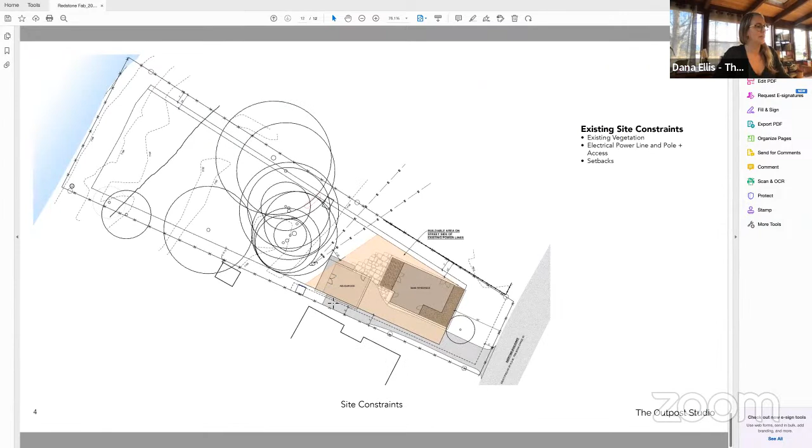I'm going to quickly jump ahead—Suzannah, we did represent this back when, I'm jumping to the end, with the flipped floor plan, but it was still in progress. We were still finalizing some things with Holy Cross Energy. We have since finalized those things.

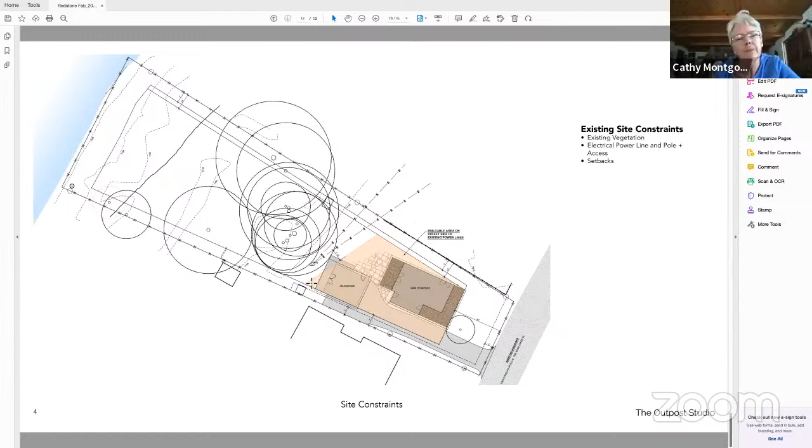This is still maintaining, but what you're going to notice is that we had to shift this little triangle of deck out of here, and it's now over here. So now I'm going to flip back. This is our updated site plan.

You can see that there's now stair access coming in a very annoying little triangle up to a reduced deck. It's less than ideal, but it keeps us outside of all of Holy Cross Energy's clearance requirements. Now, I also should say a different client, a different owner of this property, would spend the $20,000 to just relocate what is an insane location for an electrical pole.

But we're looking at a multi-generational family really trying to do this as economically as possible. That is an anomaly in Pitkin County, and we understand that.

We are making certain design decisions to keep the electrical pole because it's cost prohibitive to move it. So just to give you guys a sense of the economic scale we're working with, I have other clients for whom this would be a blink of the eye—just move the pole. We're not taking any of these decisions flippantly.

So we came up with a design that works with the clearance requirements. It's a little awkward, but it keeps all the circulation on the back face of the property, which we felt was better versus having a bigger impact to Redstone Boulevard. We're putting the anomalies or compromises as much to the rear as possible. That was intentional.

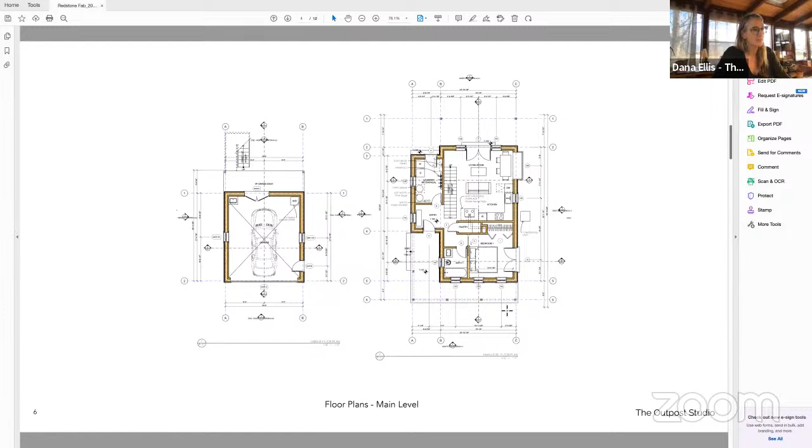The upper level, we brought the dormer to align, and I had this idea even when we were in the meeting, to align with this bathroom. So essentially the bathroom edge right here where this tub is will be within a tighter ceiling constraint. We had it originally aligned with this closet, but I think this was a reasonable and programmatically simple solution.

It does make the bed nook a little tighter, but I think that still works for this family quite well. We also reduced the covered deck back here by a few inches to tighten up those clearances for Holy Cross Energy. That was less than ideal, but it does mean our roof projection on the back decreases, so in terms of the area of roof to dormer, because of that pullback on the backyard side, we didn't achieve as much as we could have had we not done that.

In terms of percentages, the 512, we did look at the 412. At the end of the day there were a few reasons for this, but I liked the proportion we were left with between the 1012 and the 512 in this little bit. When it becomes like a sliver, there's something about it proportionally that didn't feel as good, to be honest. We wanted it to be enough of a change that you all would feel comfortable with it. Bringing it down to a 612 can happen, but this is where we landed from a few different iterations and explorations.

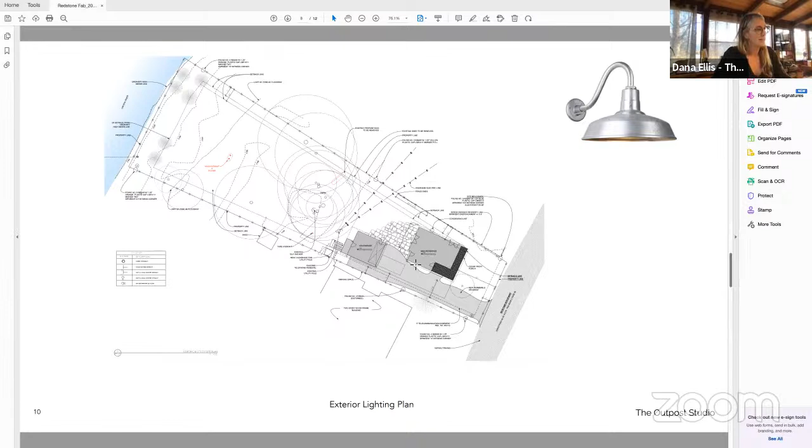And I'm trying to think if there's anything else. I think everything else you've already seen. So I'll go back to the diagram page because I feel like this gives a nice overview of what the sticking points are. And I will mute myself and turn it back to Jason.

And Jason, I have a couple other little things. Okay. The stair on the back of the garage is not in conflict with the guidelines, so that's fine.

The other thing that I recommended, this is so minor, but the flue at the ridge line should be kept as minimal as possible and not try to make it something. I thought we should suggest that having a metal flue in that location would be appropriate, as opposed to boxing it out or putting a fancy cap on it or something.

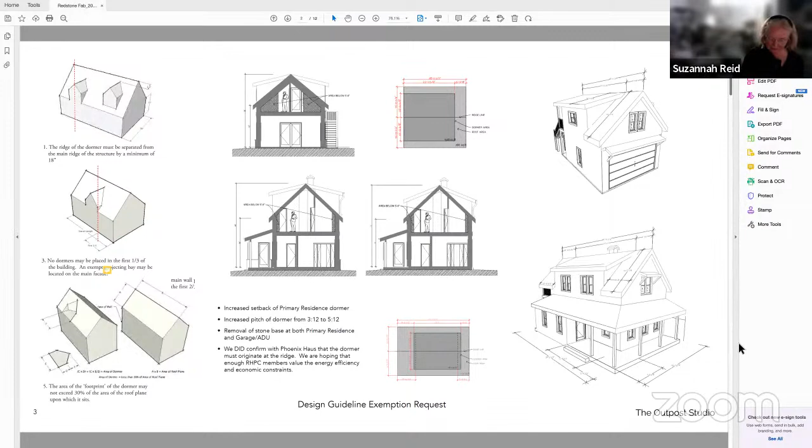Got it. Do we have any other outstanding items? The one other thing I would like is just to confirm what the roof pitches are, because the elevations have two different sets: one says 1212, one says 1012, one says 512 on the dormer, and one says 412 on the dormer on the main house. So I just want to confirm for the record which is correct.

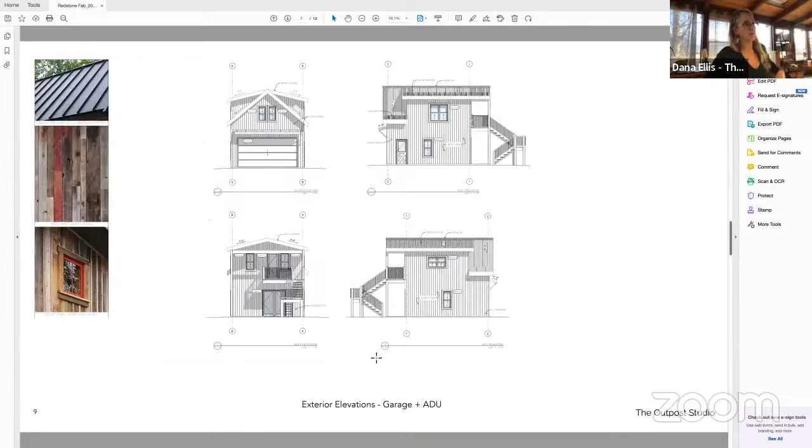Yes, so on this front elevation it's a 1012. Oh, I see that, I missed that, Suzannah. They are... I will double check actually while we're at it, I'll stop share for a quick second because I have the file open. I missed that back. I think they're 1012 and 512. That's the one I've been going off of.

That was in your head, but I just want to be sure which one it is. Yeah, the 1012 versus 1212 though, I need to double check that because as I look at that, I'm like, that might actually be 1212. Let me double check. Great, thanks. They were labeled that way in the prior application too, 10 and 12 separately. Yeah, so some of that was a holdover.

Cathy, Dorothea, any questions about the changes that you've seen?

I believe they addressed the issues we discussed last time. And the code is so specific for our needs. All the rest of it, what they could do to save money, is interesting, but really I want to focus on the fact that the modification of the Redstone Code to address those needs is what this committee has got to focus on. I appreciate the focus on the issues identified at the last meeting to meet the criteria of the Redstone Historic Preservation.

Obviously in the back of my mind is this: the historic credibility of Redstone is unique, and that's what this committee has always focused on, to make sure we maintain that integrity. I appreciate the focus that Suzannah and the board have in making sure we don't lose that intensity of protection for Redstone. It is more unique than we ever thought it was. As you look around at the construction, for example in downtown, entry to the Crystal River Valley is not quite the existence that I thought it would have at this time in history. So I appreciate that, and that is our focus.

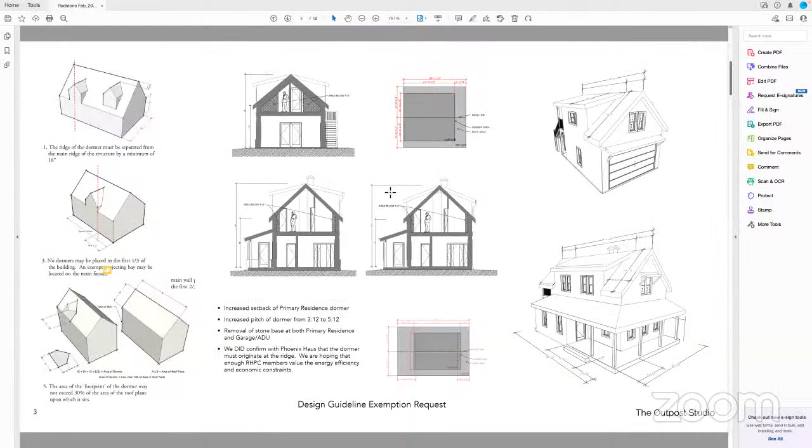Those are my questions. Unless that's prompted other questions from HPC members, I think we just need to make sure we ask for comments from members of the public if any are present. We do not have any members of the public. Thank you, Bonnie. All right, I think that moves us into HPC comments next.

Dorothea, do you have anything that you want to add from your previous comment?

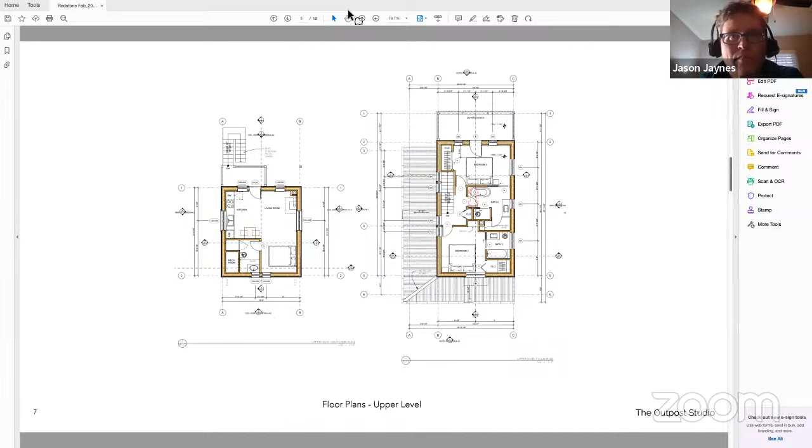Oh, if you're speaking, I'm sorry, you're muted. I thought...

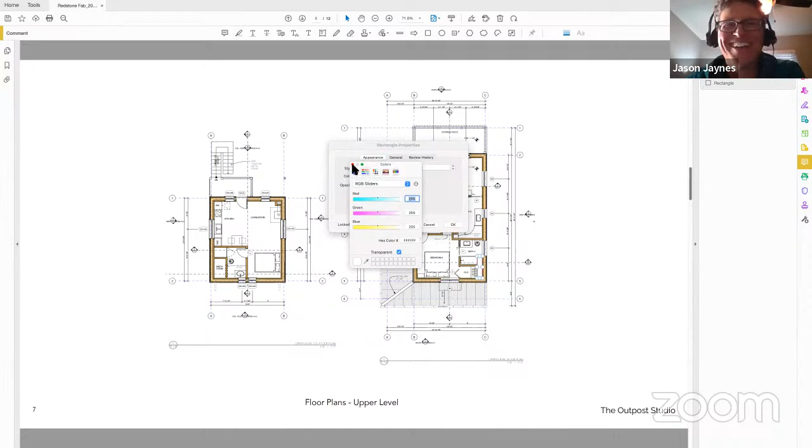I like the adjustments that have been made, and I appreciate what Rochelle and Gina are trying to do here. And I like it. Anyway, that's me.

All right, thanks Kathy. A couple of things for me. Number one, I would jump right to the flue. I completely agree with the suggestion that it be simple. I go back to my experience of when we built our house. We were concerned about the finish of the metal flue for our wood burning fireplace.

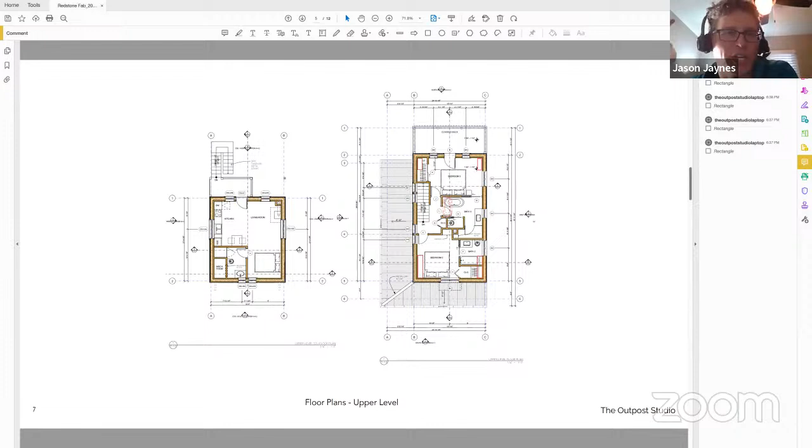We committed to putting a patina on it. We actually got an oxidizing material to put on it, and it basically ruined it. It looked terrible. So I don't know that there's a whole lot other than just trying to minimize it that we can do. And so I agree with Suzannah's suggestion or recommendation that that'd be the way to do it. You know, kind of anything else is just going to make it bigger and more visible. So I'm completely on board with that.

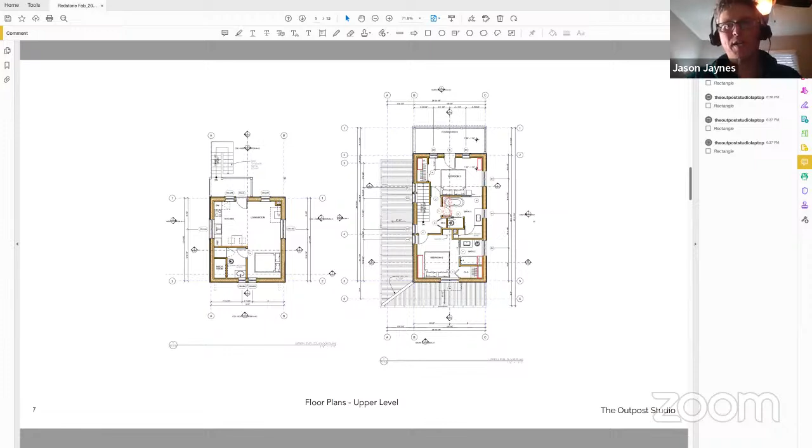And then as it relates to the other elements and items, I agree with what I think Dorothea was driving at, which is very sympathetic to the energy goals, very sympathetic to the budget constraints, which get more and more real every day, and that we have to be at a place where we feel comfortable saying we would approve this under kind of any circumstance, given the factors at play and given our review of the guidelines. And I also would echo what Dorothea said about the modifications, that it's very clear that you took them to heart. And I, for one, really appreciate seeing those changes.

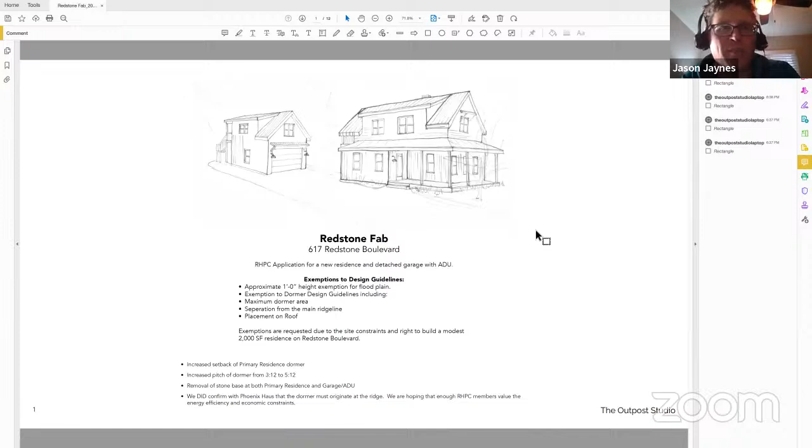I think they've made a significant difference, quite honestly, on the scale of these, what are frankly much smaller houses than you typically see out in the community. And I know that mine on the boulevard has some very similar characteristics. Reducing that plate height and reducing the scale of the second story, to me, brings these buildings kind of into proportion with themselves. Otherwise, they end up looking kind of tall and tippy and ungainly.

And so that, while the plate height requirements and the dormer requirements have very specific historic preservation kind of reasoning, I also think there's a scale of proportion kind of mass component to it, that as that plate height comes down and gets a little bit closer to being in relationship with the header of the window, quite frankly, I think the buildings feel a whole lot better, and this has made a huge difference.

And what Suzannah put in her memo that I think is really important that we talk about is, if we're moving to a place where we're going to be interested in saying, like we think we're there, or we think that we're close and we'd like to move forward, to not, even though an individual application doesn't set a precedent, but to not just completely open the door to having two-story buildings on any future application and having to defend the integrity of the guidelines.

I was looking very closely at things like the lot constraints, and initially I wasn't so sure that the lot constraints were a huge factor, because there are other quite small lots, in quite narrow lots on the boulevard. But when you take some simple measurements, the overhead lines in the back are significantly more constraining than in most cases. And it largely has to do with the rake of that kind of second line that runs across to the neighboring cabin. And that pulls in 15 or 20 feet of usable lot space.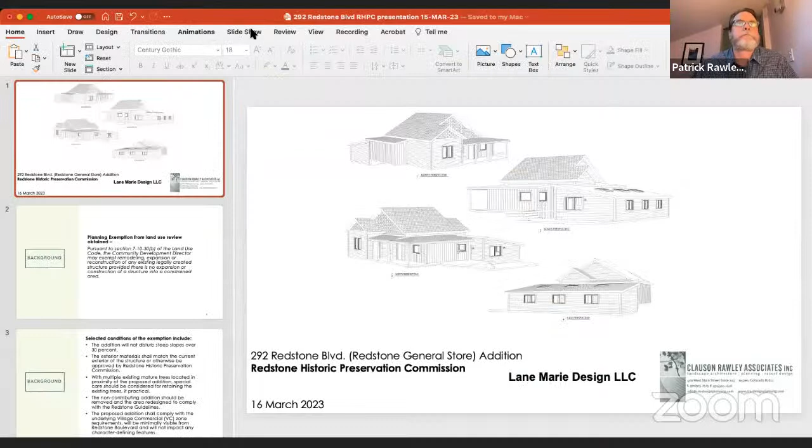And we'll go through this presentation and try to make it as painless as possible. So again, this is 292 Redstone Boulevard. I love the Boulevard—I think of the Boulevard of Fame when I start thinking about it. But this is the general store. As Suzannah has pointed out, this is a rather utilitarian addition to the rear of the historic resource for expansion of the kitchen facilities and some other back of house additions that will support the commercial use of the general store.

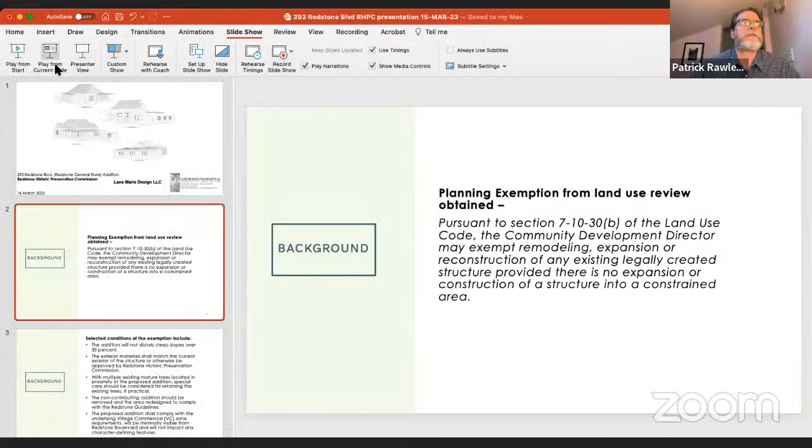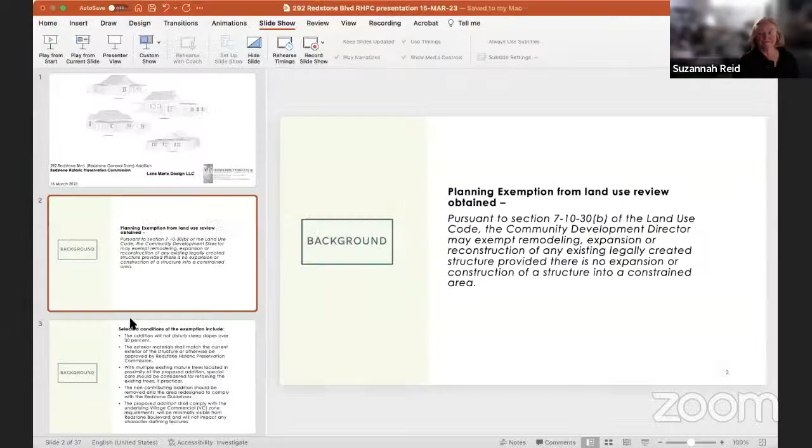Pardon the interruption, but it's flashing in and out, and I'm getting a lot of black screen on my end. I don't know if that's just for me or everyone. Oh, I'm so sorry, let's see. Let me try to get out. It's giving me a weird presentation view that wasn't happening before. Is that a little bit better? No? Doing it. You can just— Is that a little bit better? Yes, that's better. That's staying.

Good. So a bit of background on this—I'm sorry, now I need to try to change my view. So a bit of background on this: this matter was actually exempted from land use review by the Community Development Department. Exemptions are utilized by ComDev to allow greater time for more detailed or more involved land use applications. Generally it's small additions like we are proposing here, additions and activities that don't impinge upon geologic hazards or require additional studies. So we were given an exemption from the land use review process.

Now I can't forward—there we go. Now we have a number of exemption conditions that have dictated how we have approached this project. Of course we can't disturb slopes greater than 30%, which we aren't—we're on a generally flat town site lot, as everyone is familiar with. The exterior materials—staff told us to match the current materials, or whatever recommendation you provide to us. We look forward to discussing those materials and responding to your suggestions.

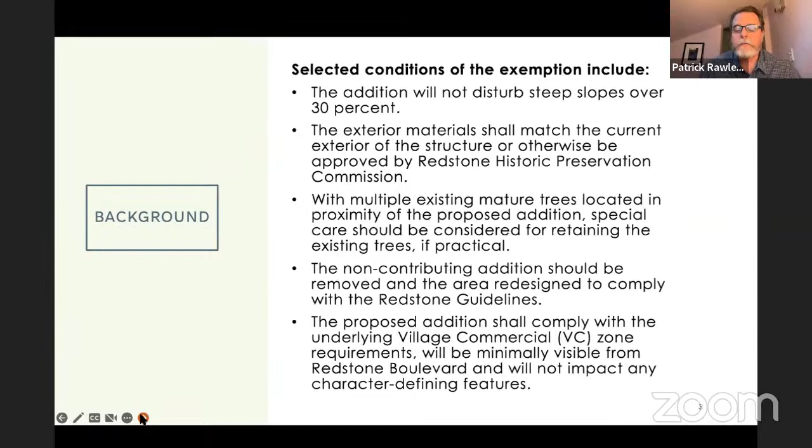A condition of approval is that we need to comply with the underlying VC zone district requirements, and—very importantly here, I want to stress this—be minimally visible from Redstone Boulevard and not impact any character defining features. So that has dictated how we have approached this addition, to provide a very low slung, quiet addition to the rear of the property that doesn't take away from the historic character and integrity of the resource.

Continuing on, the staff has required—that's why we're here tonight—we need a resolution from you indicating that the building plans have been reviewed and that we comply with the relevant guidelines. We need to provide a detailed revegetation landscape plan, which would be mitigation for the one spruce tree we propose removing. If the configuration of the addition is modified, or the separation changes, that will impact the second spruce tree, which is fairly large and would have a greater impact if lost. We also need to provide representations that the colors are indigenous, earth tone materials and colors. We'll discuss that in depth, but that's generally the overall exemption we received from community development.

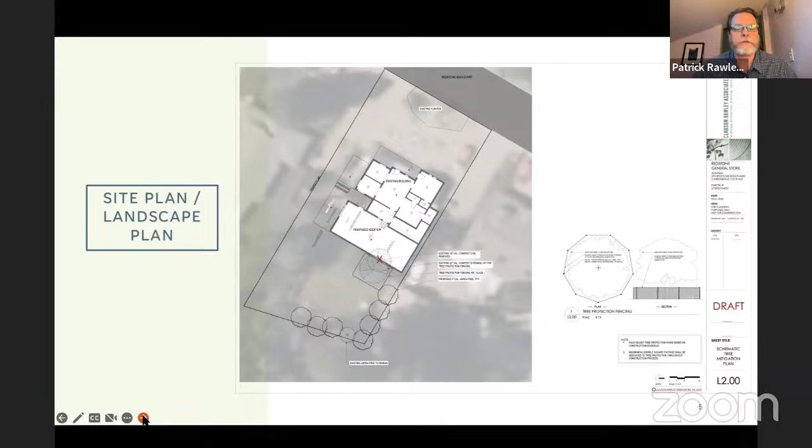So with that, I will turn it over to Lane to discuss the architecturals. Lane, just give me a nod or an indication that you want me to advance the slide. You're muted.

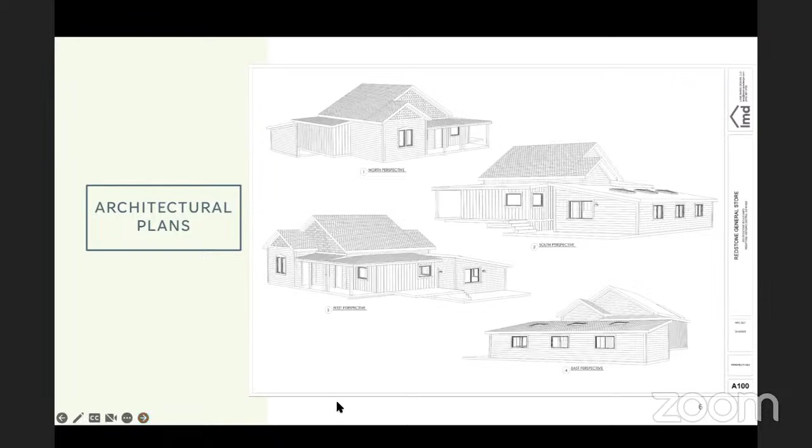That might help. So these are just the perspective views—Suzannah, I saw in your feedback that you wanted to see a little more detail added. So I did some additional work on the model, adding hatches just to more realistically represent the trim conditions and siding conditions of what we're proposing as well as what is existing there.

You can go ahead, Patrick. I guess I would like to point out too, this is the north perspective, but it's really kind of the western facade. This is the front of the general store as we appreciate it, with some non-historic additions, and then the addition we're considering tonight here in the back.

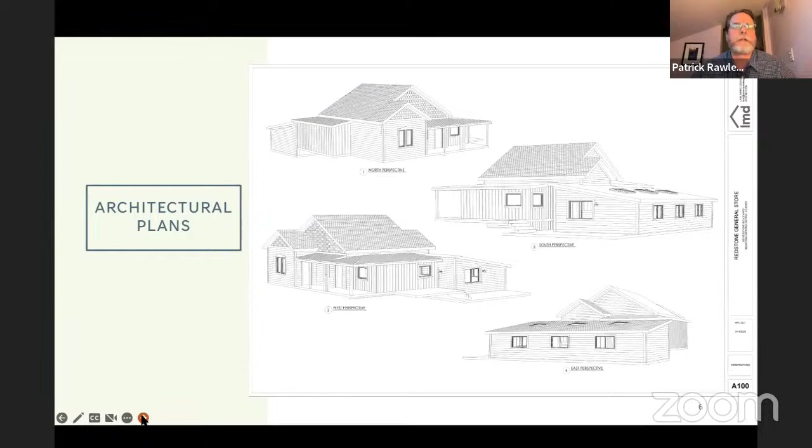This view is south, looking really kind of quartering the parking lot. Here is the wraparound deck on the store, and here's the addition. You can see this wraparound deck again, what we appreciate as the general store, and then what the view in the rear yard would look like. Just wanted to help orient at that. Sorry. Thank you. No, thank you.

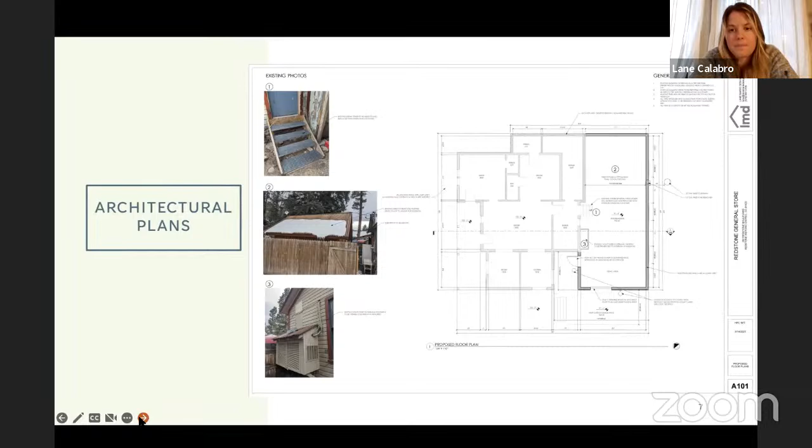This is just demonstrating the roof plan a little more clearly with added materials as you requested, Susanna. I kept the shed roof the same pitch as the other shed roofs already attached to this building. Again, like Patrick was saying, it was really important for us that this would kind of just go away and you could focus on the main store, which is still the first thing you see as you're driving by.

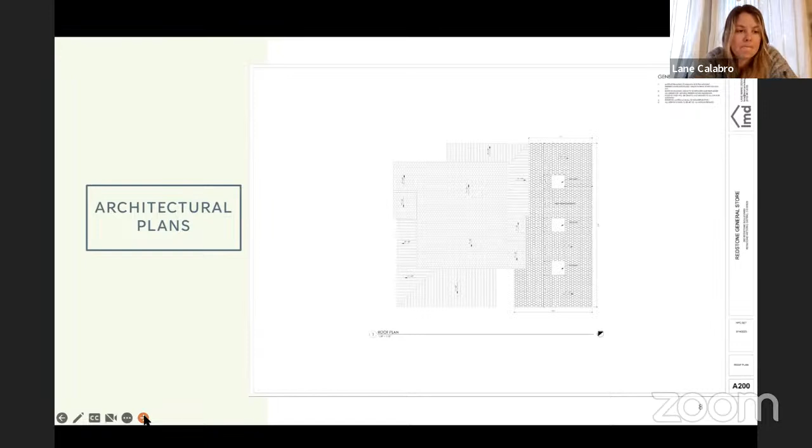We've got some elevations here. So the existing has been grayed out, whereas our addition is a little bit darker.

One thing that came up that Patrick and I were discussing is we could reside that shed that has the pallets in front of it, because it doesn't look that great right now. So we could do something that would tie in more seamlessly with our addition, making it look like one mass, all intentionally constructed together, rather than the piecemeal situation it is now.

And then along the back, most of that is already covered by a fence. There's a little shed roof—you can see it's there in blue. It's open on the side. We'll demo that, clean it all up, and enclose this area.

I wanted to address the windows too. I really went with the horizontal oriented windows because that is what's existing on the ice cream shop area.

You can see one of those windows behind that pink little trailer there. That was really driven by the plate height on that lower edge of the roof, which isn't very high. So we wanted as much natural light as possible to come into the new addition, and also to have operable windows. They're just horizontal sliders, but we'd do a wood sash window to match what's existing, and also include the 1x4 trim painted red, as you see on the historic building.

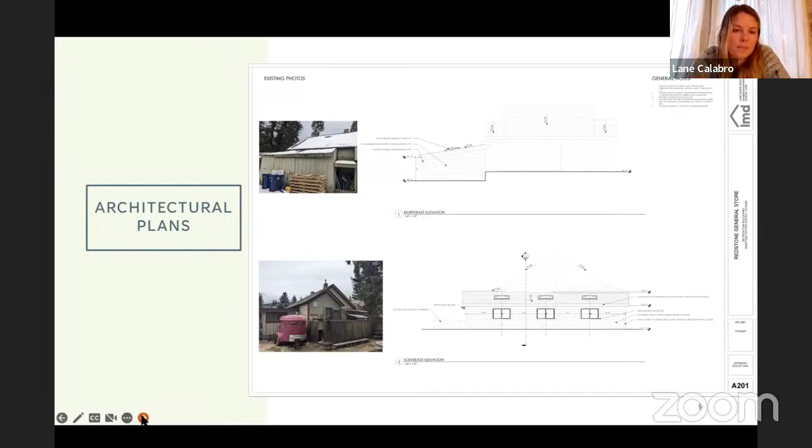You can see the windows here as well, same proportions as that ice cream shop, as shown in the photo and elevation. There's even another one on the lower, southeast elevation facing the street. So we're playing off that, really expanding the customer-facing area, having a window you can pass through, like another kitchen, so there's another spot where people can line up and get their food, or whatever that turns out to be.

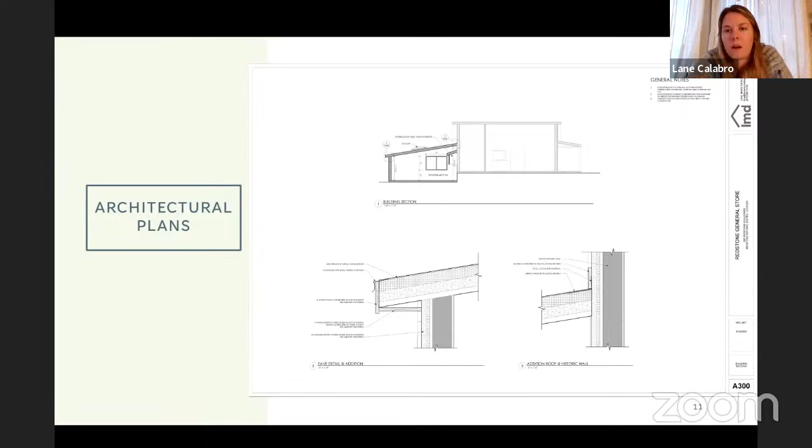These are a couple more details that were requested by Susanna. I did a basic eave detail showing we're going to do a wood fascia to match what's existing, just a very simple trim drip line. We're not going to do a big gutter, just a little drip edge there. The section detail to the lower right shows where we're tying into the historic building, where there will be some flashing to make it watertight. Then, as is done on the front of the building already, we're adding another piece of 1x trim and painting it red, matching the condition of the shed roof that covers the patio on the front.

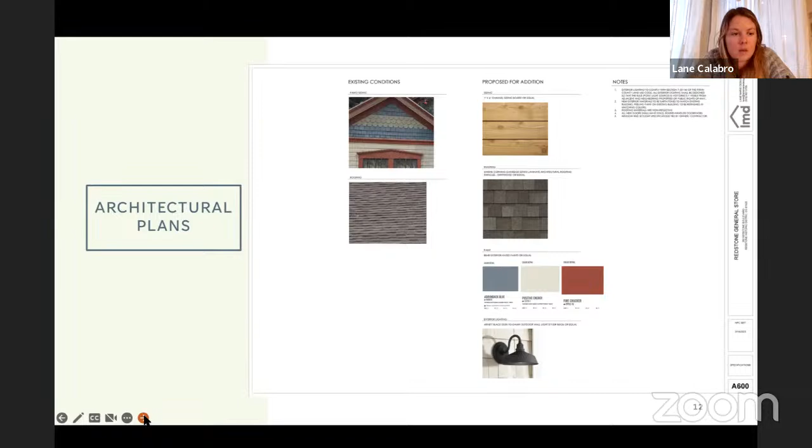Thanks, Lane. So I wanted to go through some of the standards for approval that Susanna has provided. It needs to be compatible with the general design, massing, volume, and scale of the historic structure. Susanna has responded that it's a one-story addition to the rear, as it is.

But the application doesn't specify if the addition is attached to the historic sections of the building or to later additions. So we'll clarify that — as Lane has already noted, the addition will generally be attached to non-historic walls, with only one area of connection to historic walls. That's indicated, I believe correctly, Lane — yes — in this small section right in the middle of the building at the rear, where we'd be attaching to historic features.

As Lane already pointed out, this hatching on this wall is a non-historic addition, while the historic elements of the structure are shown in that lighter gray.

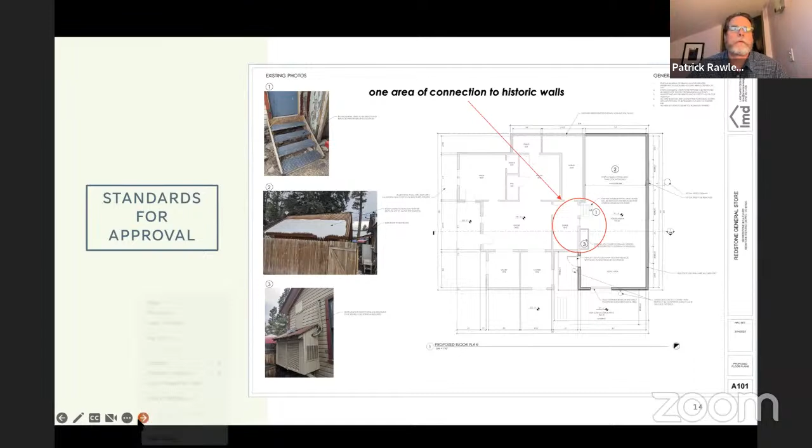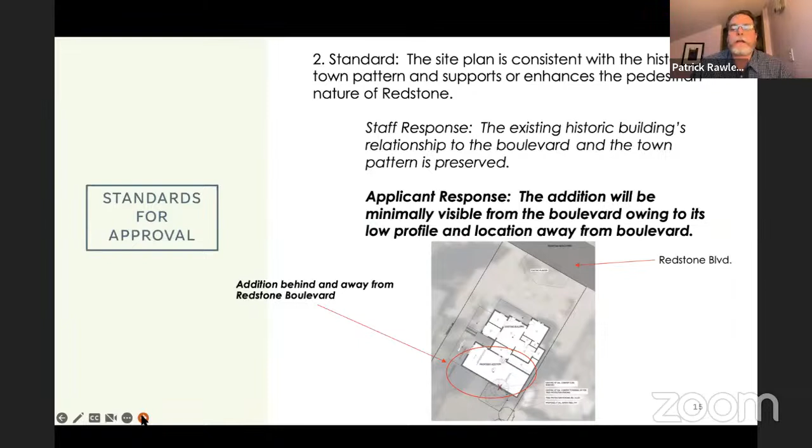Sorry, having a little sensitivity with my mouse. The next standard is to be consistent with the town pattern and enhance the pedestrian nature of Redstone. Susanna has responded that the existing relationship to the boulevard is preserved. What was driving our approach was that the addition will be minimally visible from the boulevard, maintaining the pedestrian environment we all know and love. The low profile nature of the addition will emphasize the importance of the historic resource rather than drawing attention to the addition in back — a very utilitarian, back-of-house type feature we're trying to create.

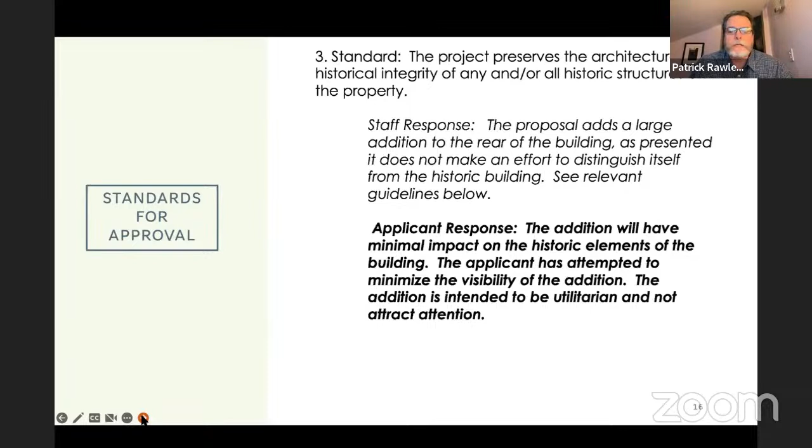Standard number 3 is the project should preserve the architectural and historical integrity of any and all historic structures on the property. Susanna has noted that the proposal adds a large addition to the rear of the building and doesn't make an effort to distinguish itself from the historic building. What we've tried to do is minimize the impact on the historic resource and its elements as possible, so we wanted to minimize that visibility. As I've said, it's utilitarian and not meant to attract attention.

So again, looking at this, what we all appreciate is that the general store should be the focus of the structure and of the property, and that the addition in the back just slowly fades away, so people won't fully appreciate that it's actually there. In fact, we're cleaning up a lot of messiness that is behind there, unifying the construction as it sits today.

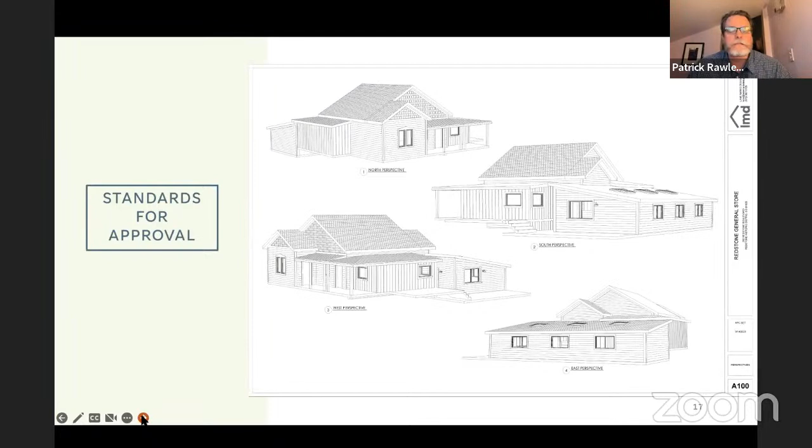Now, the question of parking has arisen, and this was not something we addressed with the exemption letter, and frankly we weren't really anticipating this being a question. I understand the front yard is a bit unique, but I think that reflects the previous use as a gas station. The parking demand is not anticipated to increase with this addition. Again, this addition supports the existing and ongoing commercial activities. The VC zoning requirements require 2 spaces for commercial activity, and frankly, because of the nature of the general store and how it serves the community, that probably would be detrimental to the commercial use.

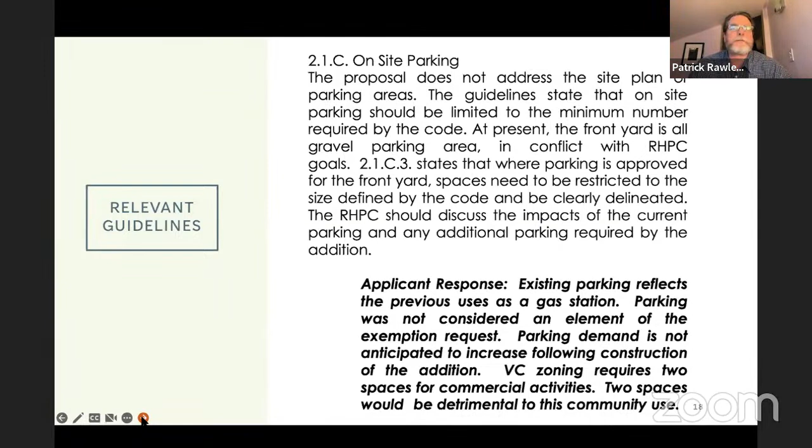Concerning the topic of the dumpster, I fully understand there's an interest by the RHPC to limit the visual impacts of dumpsters from the boulevard. We really hadn't addressed that, but we'd be happy to. Lane and I have come up with a couple of options. Mine is probably the more easy, low-hanging fruit: provide a trash enclosure to obscure the dumpster, which could be done generally where the dumpster is located today. We haven't studied it closely, but that may have some issues with setbacks. Still, the trash enclosure could be useful in breaking up that northern facade to meet the relevant guideline of a 30-foot wall length that you have instituted.

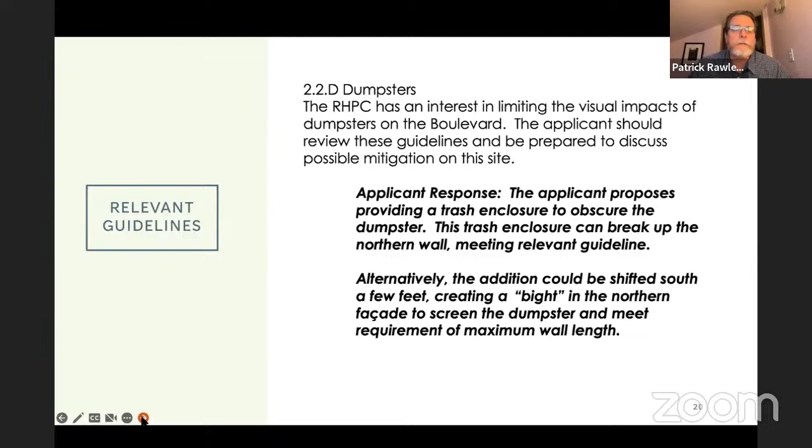Another option Lane has come up with is that this addition could be shifted to the south, which would create what I've called the bight - a little area where the dumpster could be tucked in, screening it without requiring an additional trash enclosure structure. It would also serve to break up the facade wall on the north side to meet that 30-foot requirement. Here's a very rough sketch of what it could be. The possible dumpster enclosure would be located here, in kind of a common drive between 292 and I believe 306, the property next door to the north. Or here's an indication of how the addition could be moved to create this notch or bight where the dumpster could be located.

Lane, do you have any comments on that? I hope I represented that accurately. Yeah, that was exactly what I was thinking - to kind of kill two birds with one stone, having a more dedicated place for the dumpsters, especially since we're fairly close to that lot line on that side, and also breaking up that 30-foot run, as you said. Right, and there's actually some utility there - this is a driveway, so it could be an issue, but that's certainly something we'd be happy to study. I think it's a bit outside the topic of the addition right now, but we could certainly look at that.

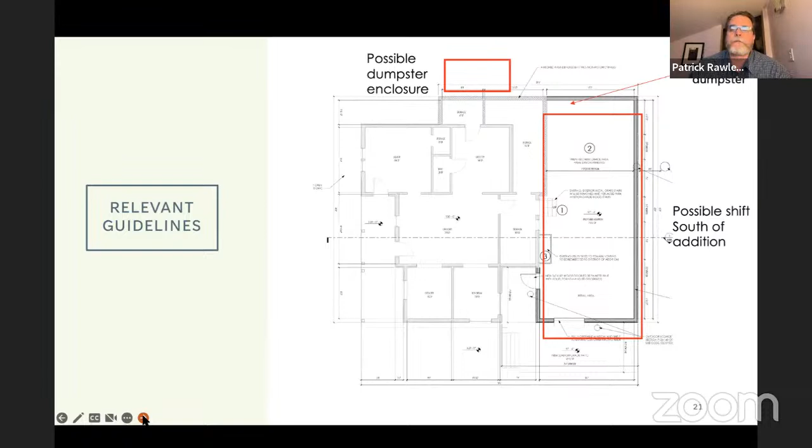Concerning signage, we have no additional signage being proposed as part of this. Again, this is an addition to the ongoing commercial activities, so no new uses would be instituted that would require any additional signage. I think everything is adequately signed, so nothing is changing in that regard.

Concerning the landscaping, we are removing that one conifer, and if this addition were to change, we would likely lose a second, larger tree in the back. And that, as I've stated several times, was one of the reasons for the restrained approach to the nature of the addition.

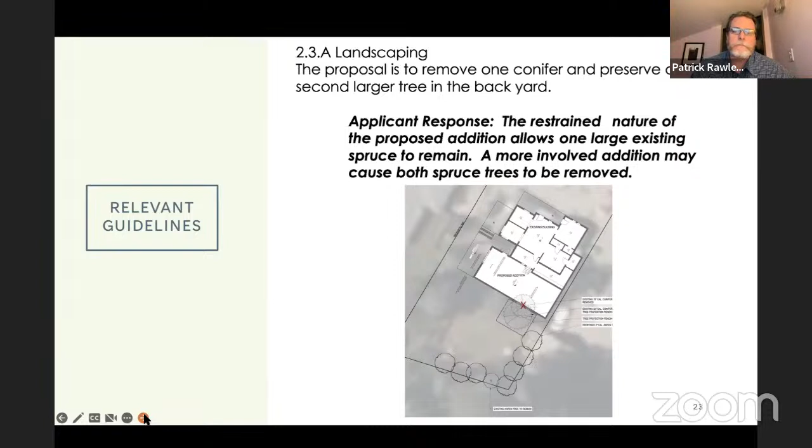Some of the guideline continues. It's unclear if the addition is attached to the historic resource. We have talked about this - we're only attaching the addition to a relatively small area of the historic resource on the rear, trying to use as much of the non-historic resources to attach the addition.

Now, concerning whether or not creating a clear distinction of this addition, making it something different that would stand out - Susanna has indicated possibly the use of an asymmetrical gabled roof, similar to what is existing but also distinguishing this addition. She's also discussed the desire for additional separation between the non-historic addition and the historic resource. We have about 7 feet where the guidelines specify 10.

And then we go back to that topic of the 30-foot long wall length that is being shown. We've attempted to address that with what we were talking about with the dumpster, or possibly shifting the addition south to attain the 30-foot threshold. The addition is trying not to draw attention to itself. Utilizing an asymmetrical gable, I think, would increase the visibility of the addition and also the impacts.

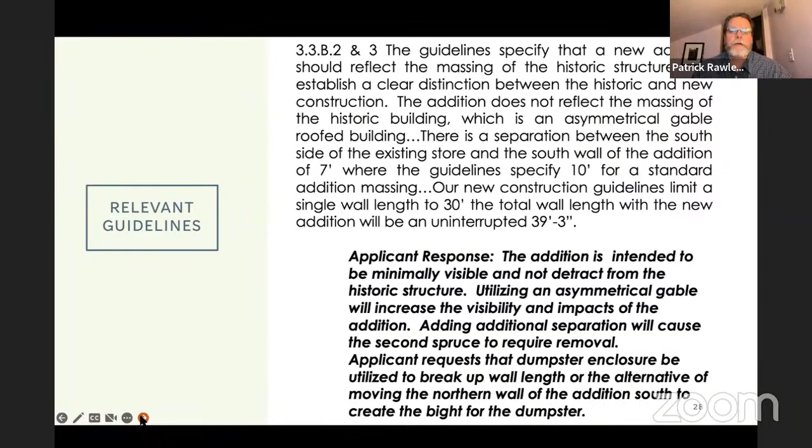That's actually kind of what we were just talking about - the asymmetrical layout, trying to use as simple an approach as possible, and also the fact that there are existing shed roofs, that additions have been made to this resource, and that was done in a shed form. So continuing that precedent is keeping with the shed roof form.

The design of the proposed roof does not complement the historic form. The roof pitch and the skylights are located in the rear two-thirds of the building. As I just said, the shed nature is intended to mimic previous non-historic additions, thereby differentiating the additions from the historic resource - not trying to mimic what was historically done, but maintaining something of its own time and reflecting the nature of the use.

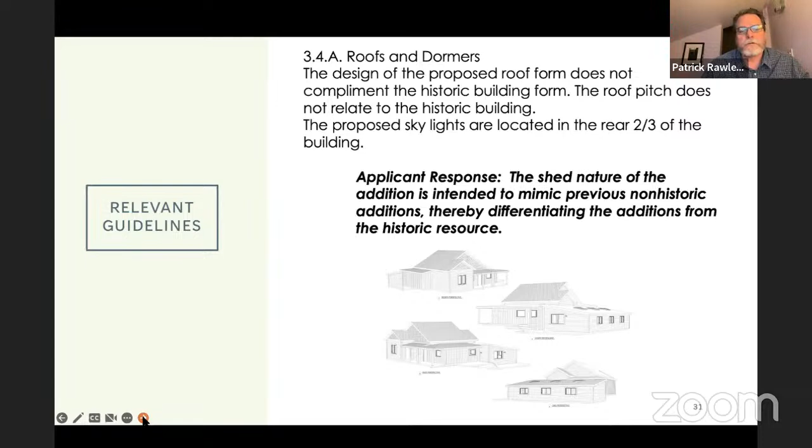Concerning the windows and doors, maybe Lane, you'd like to speak to this at greater length, since it involves the architectural design. I touched on it a little when we were looking at the elevations, but essentially I chose the horizontal proportion because there are existing windows proportioned that way, and because of that low eave, it makes more sense to have a horizontally proportioned window. However, we will tie into the existing look of the historic windows by having the wood sash, including that 1x4 trim, painted that red color to match what's existing. So it ties in quite seamlessly.

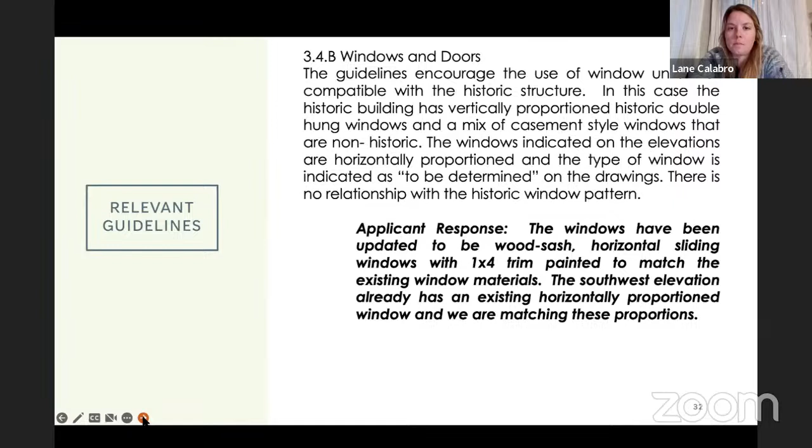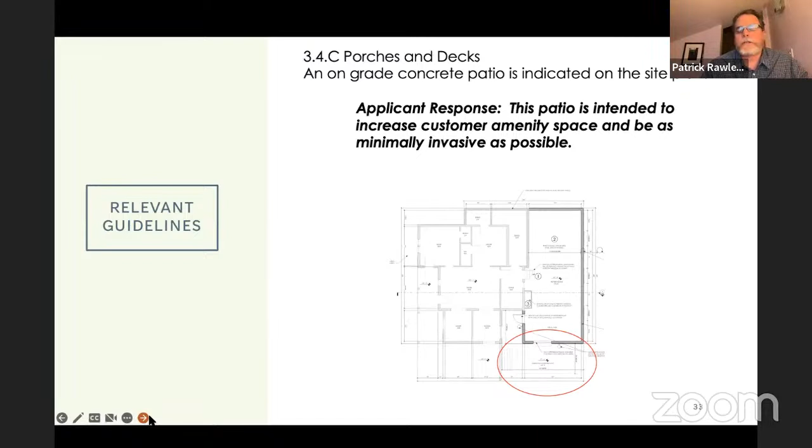There was a question about the on-grade concrete patio - this is a patio to the south of the addition. It's intended to increase customer amenity space, with that window, the walk-up window, and also to be as minimally invasive as possible. So it's just creating a bit of support to the commercial activity that's ongoing.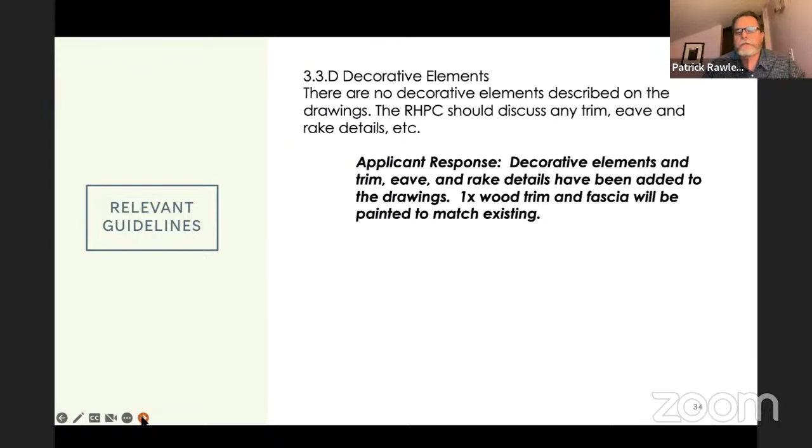I believe this is a similar discussion for you, Lane. Yeah, we talked about this a little bit in those section details that I added into the drawing set - we'll be adding 1x trim fascia, trim out the corners as well, and paint it that red color to match the existing. And I think that's a similar comment to the decorative elements you discussed before. Mm-hmm. Right.

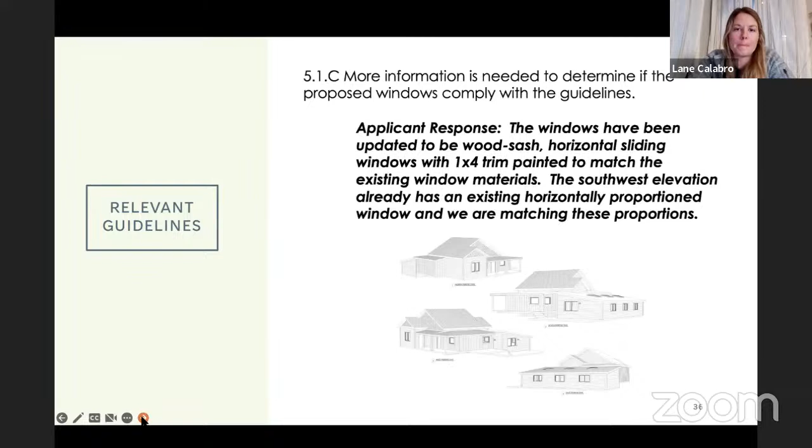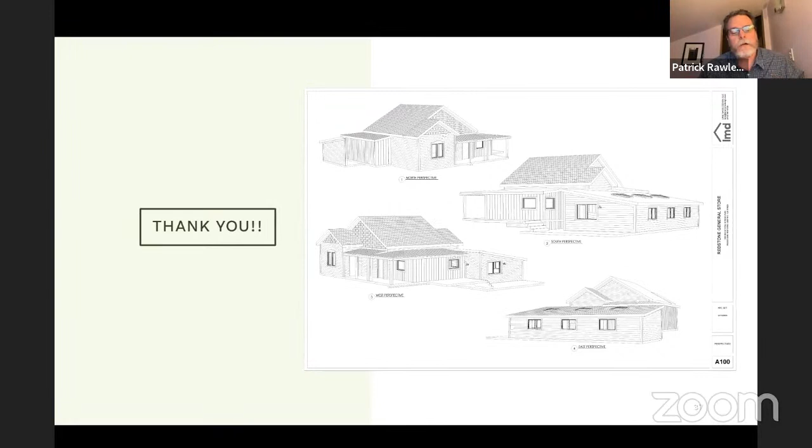Yeah, this is essentially repeating the same about the windows, wood sash, wood trim, painted to match. And so with that, that is the completion of our overview.

I hope that gave everybody an idea of really what we're proposing, and hopefully responded to some of the questions that Susanna had, giving us a greater opportunity to discuss this proposed addition. So Patrick, Lane, thank you very much. I'll keep the presentation in the background. I also have Lane's drawings available if we want to refer back, Susanna.

I just wasn't sure if you were back or not. Go ahead, okay. I am back, and I know it's time for questions from RHPC board members to staff and or to the applicant.

I do sort of wonder, because of the nature of having updated material and some updated information here this evening, if we should start with a question to you, Susanna, about whether any of the clarifications or adjustments that have been made would change the staff memo response, or if that's going to take some time to process after we talk about it today.

I guess my feeling overall is that while I appreciate that it's a low slung addition to the back, I kind of have the feeling that this whole design is being informed by other not quite appropriate additions to the building. And while I can't boil it down to a specific guideline, I think some restudy to take it to the next level would end up with a better overall project in the long run.

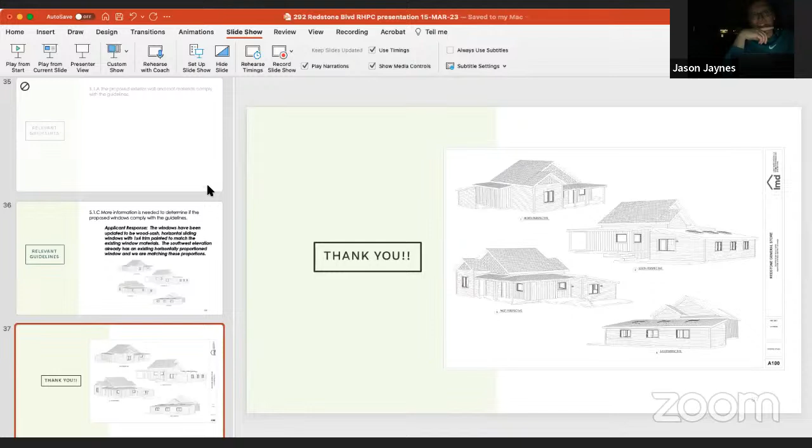I'd be happy to comment on that. I agree with everything Patrick said about this being low profile. Doing a whole design overhaul with something that would mimic that offset gable, I think could be a little more obtrusive.

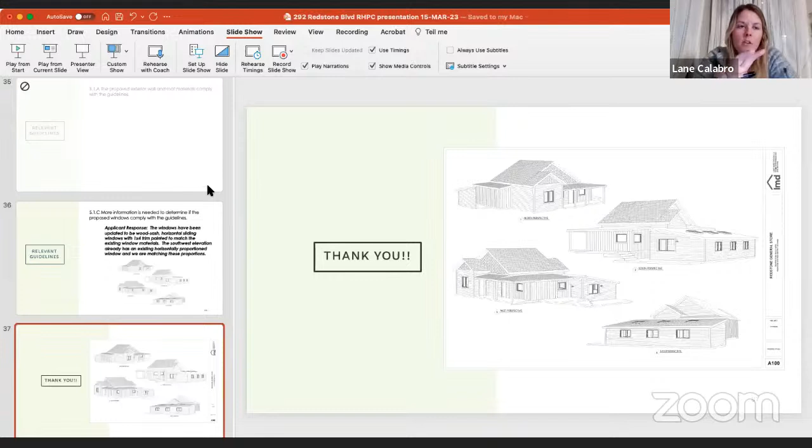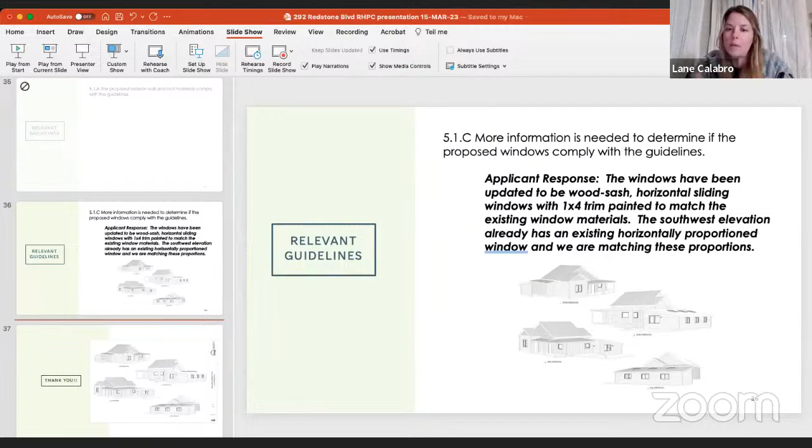But I do think, kind of the slide that Patrick was on where we talked about moving the addition slightly to the south, so it's set back - so we break up that one long wall, and maybe we jog out the addition somewhere else so it's not just a box. Maybe it becomes more of an L shape or something like that, so we could kind of tweak the form of this.

So it doesn't just look like this big chunk on the back, and it can potentially go away a little bit more and lean into that goal we have, that it's really just a utilitarian structure meant to clean up that back area and make it somewhere people would like to come have an ice cream and hang out. Right now it's a mess back there. It looks horrible, like old stuff piled back there. So I think it would definitely benefit from cleaning it up, and I think we can make some tweaks that would really make it complement the existing building.

And to add on to that, depending on the feelings and positions of the board, we're more than happy to accept some conditions of approval for a restudy and working with Susanna to verify some things, but keeping the overall approach. But maybe if we can deal with some of the smaller things, Jason, that you pointed out, through a condition of approval, I think that could be useful.

Cathy, Dorothea, do you have specific questions? I'd have a couple more after this, but I want to open that up to you.

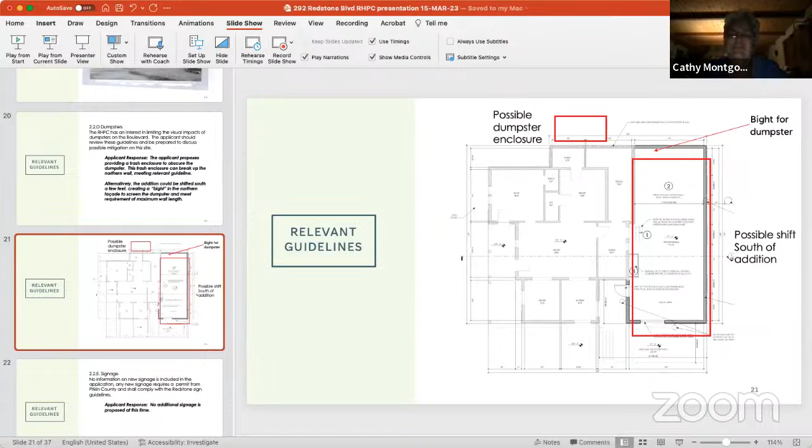Thank you, Lane. Cathy, do you have questions for Susanna or for Patrick or Lane? I kind of like the offset where you tuck the dumpster in that little section on the side there. I think that's better than a big enclosure, personally speaking. Just a comment.

Thank you, Cathy. I'm sorry, I'm just looking at my notes here. Oh, one question I have, because it does seem like a lot of the driver around achieving the necessary square footage is the second spruce tree. If that spruce tree weren't there, how would you have approached the addition design differently?

Rather than having it the whole width of the existing building, we probably would have made it more narrow and going back further into the lot, so it would be even less visible from the main street. But it's just so nice to have those old trees, and it creates such a good feeling when you're back there to have trees and for things not to be clear cut. We really wanted to preserve it, and yes, we wanted to maximize the square footage we're getting here. So we compromised by removing that one tree and adding the others.

Patrick, do you have anything to add to that? No, only that, just as Lane mentioned, trying to keep as many trees as you possibly can. They are beautiful spruce trees, they provide so much amenity to the back. It's hard to kind of look around them. When you come to a site and try to do an addition, you look at all the things working with you and against you, and it's really important to try to keep as many of those trees. So I think we didn't even consider doing otherwise. It's integral to the site to keep as many of those big trees as we possibly can. And as you saw, staff in our exemption echoed that - try to keep as many trees as you can, and mitigate if you can't. So I don't think we really considered anything other than working around as best we can.

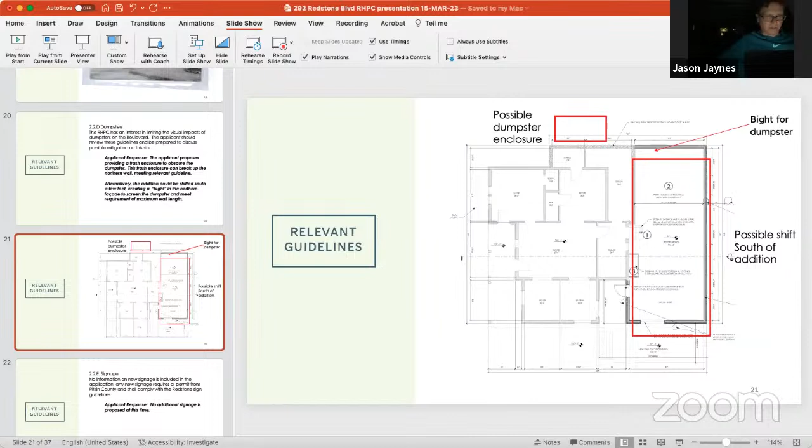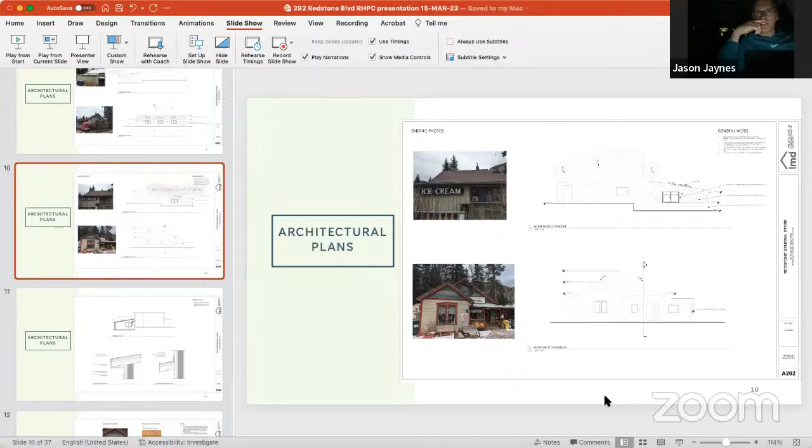I think I saw in one of the sections that at the low end of the shed roof, the clearance is about 7 feet on the interior. Roughly speaking, is that about right? Yeah, it's right around 7 feet, just below. And was that primarily to get the total mass down, or were there other functional reasons to do that?

Part of it was the location of that tree, and part of it is you don't want to go too low there. I still wanted to make sure a person could have enough head height to get over there. Just wanted to keep it low profile, really. Okay, so that was really it, just the profile of it - there's not a functional need of actually holding that roof plate low at that end. Yeah, it's really driven by where we're tying into the existing building, so there's not a specific functionality for that 7 foot eave height at the low eave.

Got it. And it did look like the existing walk-up window is fairly small and probably not functionally sufficient in terms of, like Dorothea said, a more contemporary operation. It looks like the one that's in the elevations now is actually quite large. Is that directly related to a functional need or a standard walk-up window sizing? Is there a way to break that up and have it present as a vertical window with mullions?

What are the vertical separations in the window? Yeah, with the mullions or anything like that, we could certainly explore that. It's not a specific food service window or anything that's in there now, so I would be happy to explore something that might look a little bit nicer.

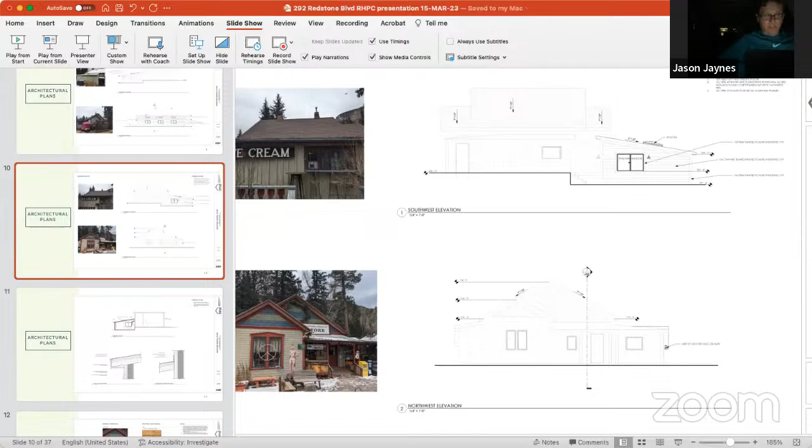In the back, I wonder if there are similar opportunities, recognizing that there was a specific reason the horizontal windows were chosen, and now hearing the feedback from Suzannah and the guidance of the guidelines, an opportunity to have those be smaller bays of vertical windows that might be ganged together, or mullions between a larger bay that starts to make it present as a vertical window instead of horizontal. I think that's something that can be explored, but I think it's more important to address that on the south side that is going to be more visible, especially if it gets pushed a little bit to the south. These ones, there's a big tree there in the backyard, so those aren't going to be visible from the street, but it's something we can certainly explore.

I can play with some different window patterns and see if we can get something to work there that is a little more vertically oriented. For the reasons you described, I don't know how strongly I feel about that, but because it's on the backside, it's also an amenity area. Even though it's not on the right of way, it's a very public zone, and I like the idea of people being encouraged to spend more time back there because it's quite pleasant. So it represents the building from a public side, just not a public right of way side.

Trying to think of what other questions I have. Let's see.

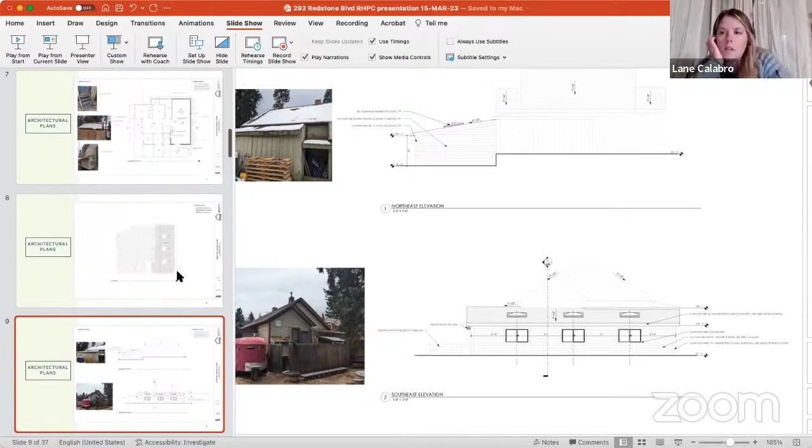Did you look at other footprint arrangements that would allow the addition to be less wide in total, but still preserve that second large spruce tree? We did look at a couple adjustments. I think we wanted to keep that shed roof orientation as it is, tied into the existing building at the highest point that it can. If we move too far away, it becomes such a low eave that it's not really usable space on that east side. So I wanted to make sure the full space is usable and it's not this dead corner where you have to duck to use that space.

I think the functionality of the backyard, as you were just discussing, Jason, was also something that we're concerned about. Lane, do you recall, I know on one of the site visits there was a trench, and there seems to be some utilities along the south side of the property. Do you recall that offhand? That could have been a constraint of where the addition would go. I don't recall. Okay.

We can check that with Jack too, because he was up there recently. Right, there was some utility work, I think it was tied to a charger or something, a car charger. But also I think the big idea is to keep that backyard as open and usable as possible.

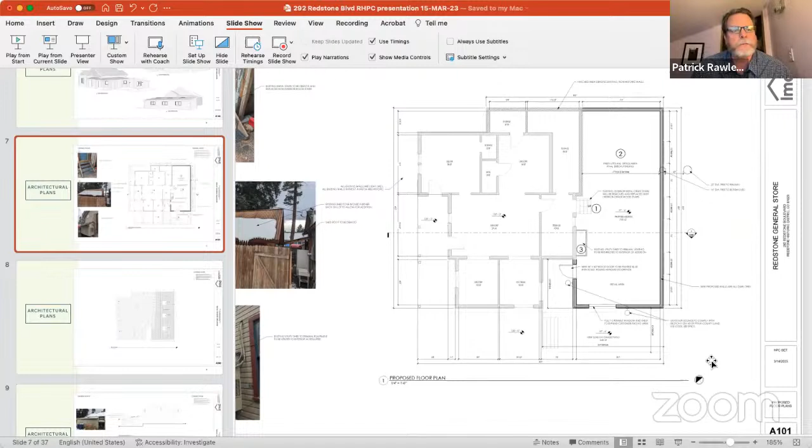Fair, understood. Can I jump in with something, Jason, for a sec? Please, yes.

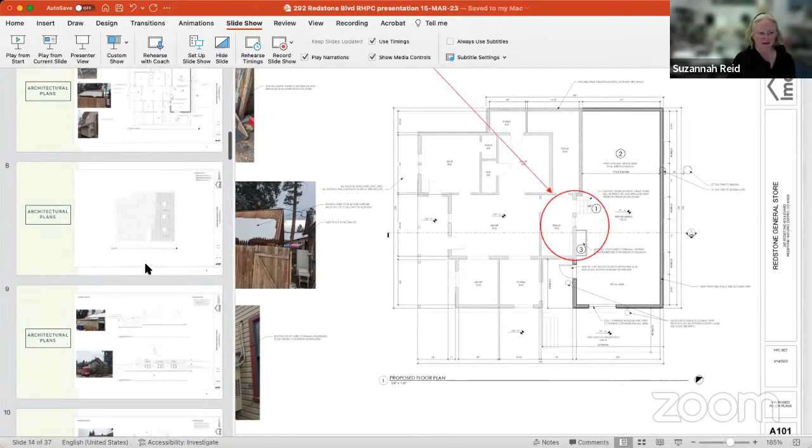I'm wondering, you kind of quickly mentioned maybe if we shift the north wall back a little bit to create that dumpster enclosure area, and maybe make this more of an L shape on the south. It doesn't have to pop out much, but taking that floor area and making it more of an L shape running to the east might give an opportunity to make a roof shape on just that southernmost section that would give you the opportunity to maybe have a gable there that would then have the shed roof behind it. That little gable would still show from the boulevard and elevate the other additions on the wraparound porch and the other things that are pretty mundane right now. I think that's a possible direction for something that doesn't go a long way towards changing what you've already designed, but just adds enough of a piece to flip it over into something a little more compatible.

Yeah, I mean, I think that's definitely something I would like to explore, especially since that is the most visible face. So if we can make it mimic that gable a little bit better, I agree with that idea for sure. And then did you say that the food service window is

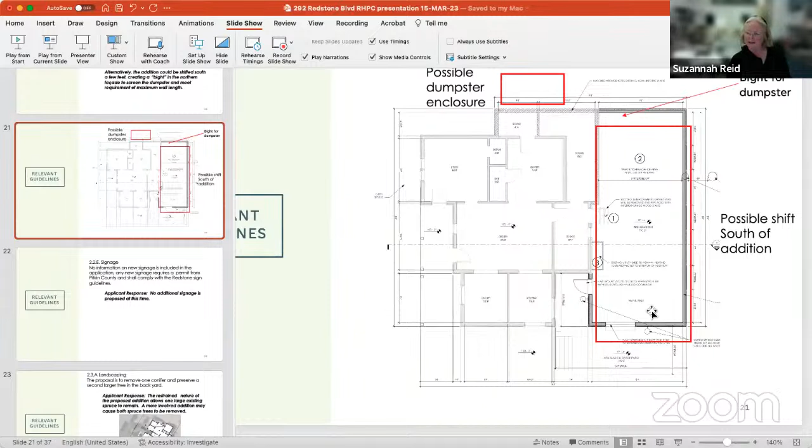intended to be an actual food service window, or you weren't sure if that was part of the functionality? That is the intention for it to be that functionality, but the particular window I have in there now isn't something that was exactly selected for that. So I could certainly look at alternatives for food service windows that could be a little bit more vertically oriented. Maybe we do something to mimic that trim on the front that has a little gable in the trim, and we could add some decorative elements to make that face of the addition a little bit more tied into the historic elements.

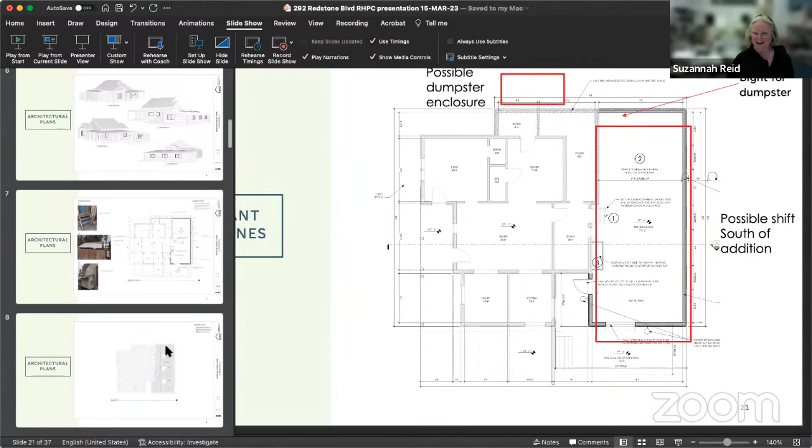I want to discourage you from the idea of mimicry, but think more about compatibility. Okay, so there's a dialogue, but not trying to take details from the Victorian, but to maintain a dialogue between the elements. Okay.

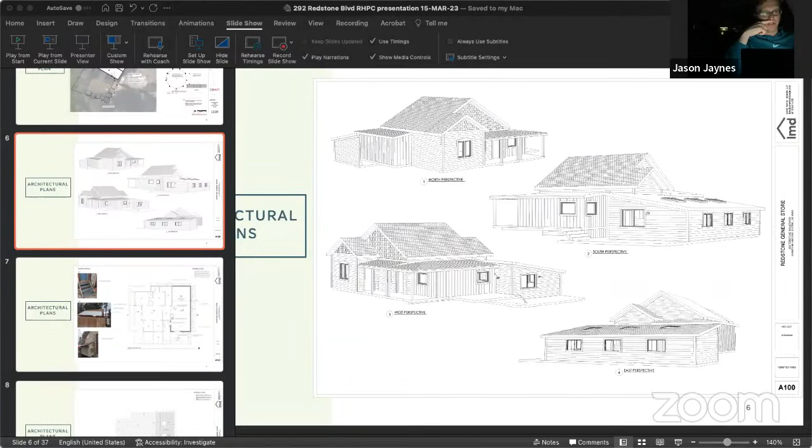So the more that can be done to make that dumpster - challenges with dumpsters migrating to the street aren't the case here, but it is something that's really important to me, because I think that's one of the single biggest current impacts, dumpsters having moved from their hidden places up to the front of properties because the servicing companies get uncomfortable with having to deal with them.

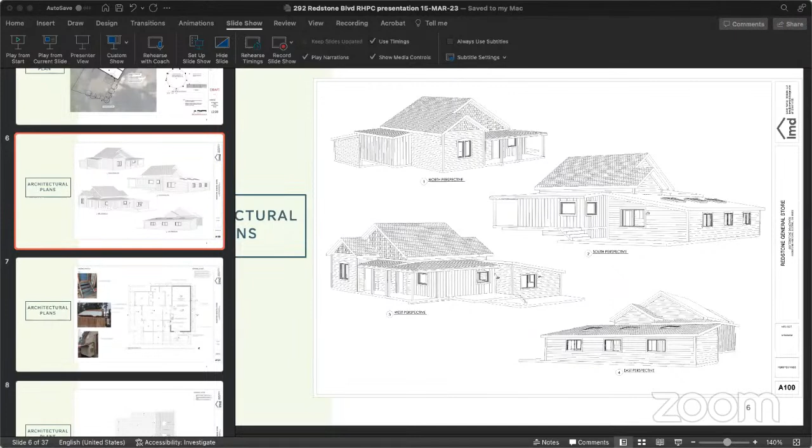So you guys addressed the signage, we talked about windows, we talked some more about details. Suzannah, you just brought up floodplain considerations - what, and maybe this has to do with the evolution or next look or study of the addition itself, the mechanical equipment that's mounted on the north wall of the historic building - I recognize that's in almost a cabinet on the wall of the building, and I'm not really sure.

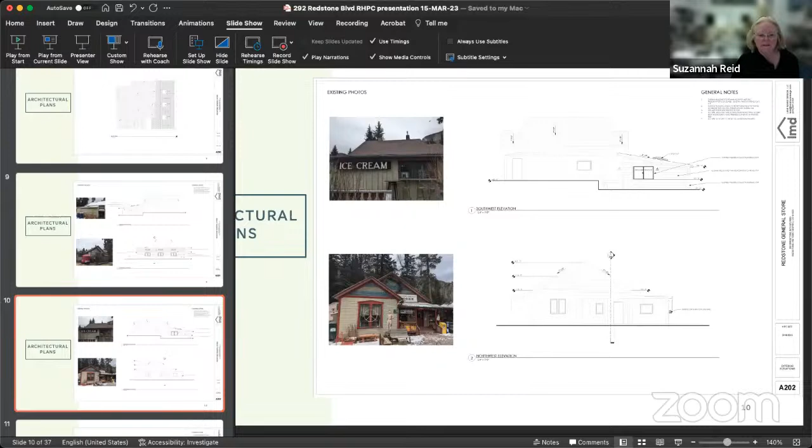There's another piece that's actually close to the front of the boulevard side on the small front gable. I don't have a picture of it, but it shows up - maybe you can see it in that picture. The next slide, if you go to the next slide, there's kind of right above the dumpster in this photo. You can see there's maybe a swamp cooler or something right in front of that little shed roof.

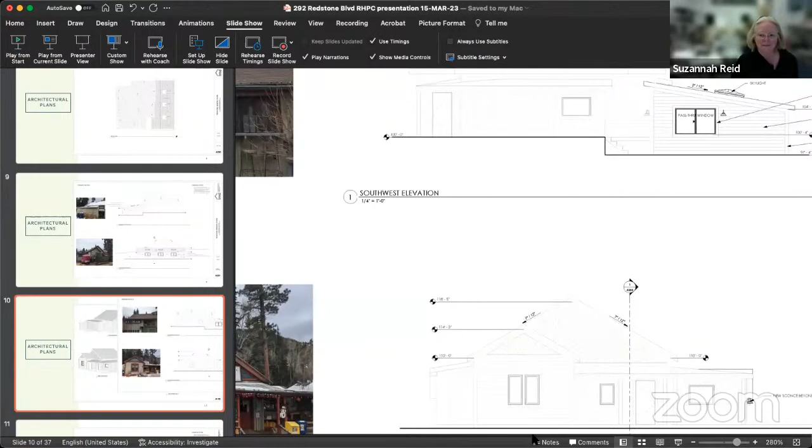Uh-oh, what happened? I've lost it. Yeah, you sent me another picture which I can't find right now, that shows it better, but it's sitting kind of right - there is like a swamp cooler or something, it looks like, and I see it's quite near the ducting, front of the building, and it seemed like there's some things like that could be addressed.

Just to improve the overall historic character. And I don't know what the options are for that, whether that's something that could be integrated into that shed there, or if it's going to be made obsolete by this new construction or whatever - something just to be on your radar, I guess. Yeah, we can certainly look into that.

That's pretty much the sum of my comments, Suzannah. And so there's a staff recommendation to table, to address some of these things - is that correct? Yes, or to continue, I mean, I'm sorry.

Okay. And to the design team, do you feel like you have the kind of feedback that you need to be able to attack this thing?

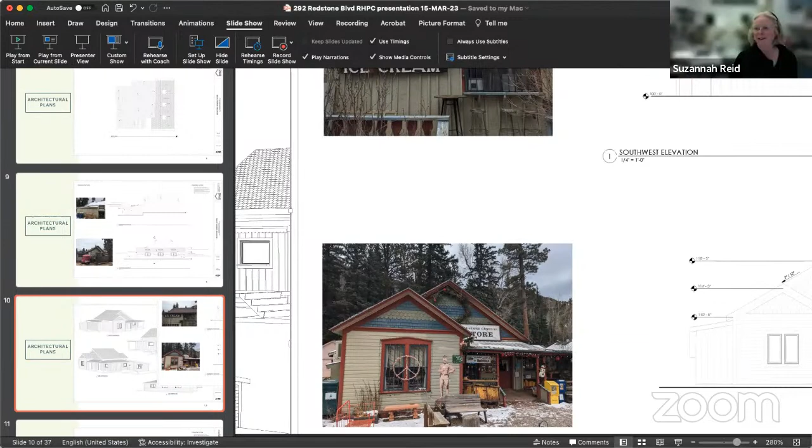And since we're down to kind of a slim board, we need to really poll the board members to see if they're available as well. I'm not available on the 27th. If you could get your materials to me by the 27th of March, then the 13th could be a meeting date.

I don't know if that works for the board. Lane, that gives you essentially next week. That works just for me. And then the 13th, I mean, anything's possible. I'm out of town, but I could Zoom that evening.

I think the 13th or the end of May are really the options at this point. Well, if that's the case, then I'll make sure we get the drawings done by the 27th. Okay, so that'd be 3/27. Great, we'll shoot for that. Let's coordinate on that, Suzannah. If we run into any issues, I suppose we can pivot.

Okay, we just need to pick a date for the purpose of the public meeting, and we can work out some of the scheduling issues if we need to. But again, that was April 13th with materials on the 27th.